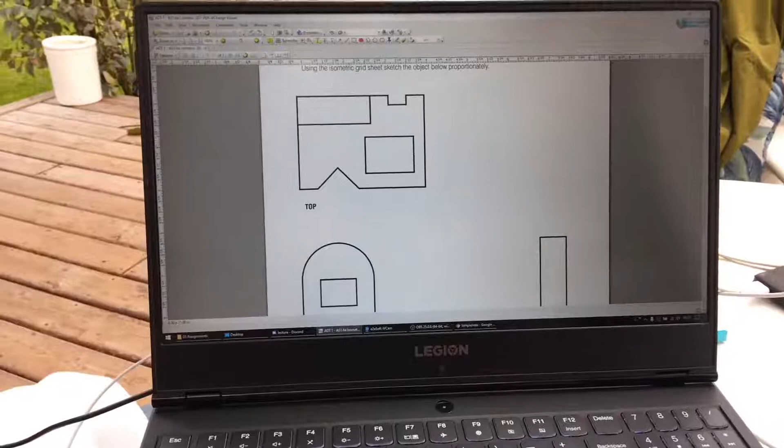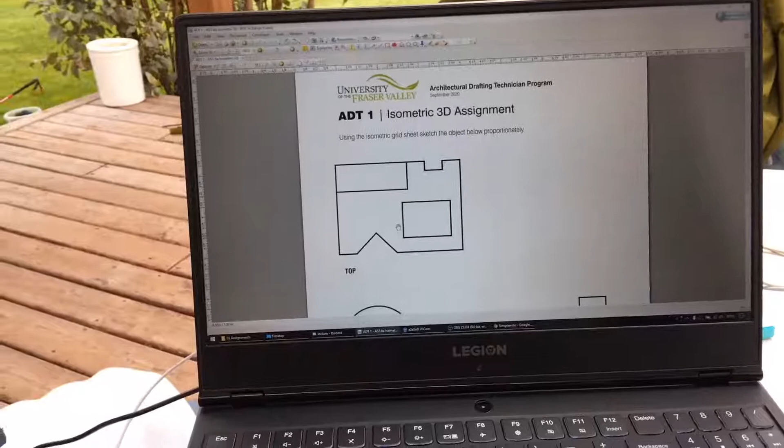So this is just to record how you would deal with the situation if you don't have your paper printed, for the isometric 3D assignment we are working on now. What you need to do is set your scale level in your PDF viewer so that you get exactly 8.5 inches measured width on your screen.

Once you've got that, then you can switch over and measure whatever you've got to do in this assignment using your metric scale. Because we'll be doing all this isometric stuff, generally speaking for the parts, in metric. Once we do some architectural stuff, we'll switch over to the imperial scale for that.

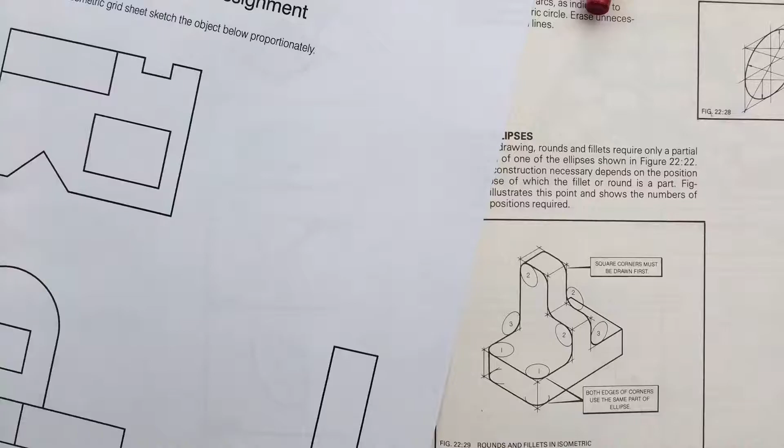So I've got a printout of this thing here, so we can start talking about how we would start drawing this thing in isometric 3D. So I got my paper here ready to go.

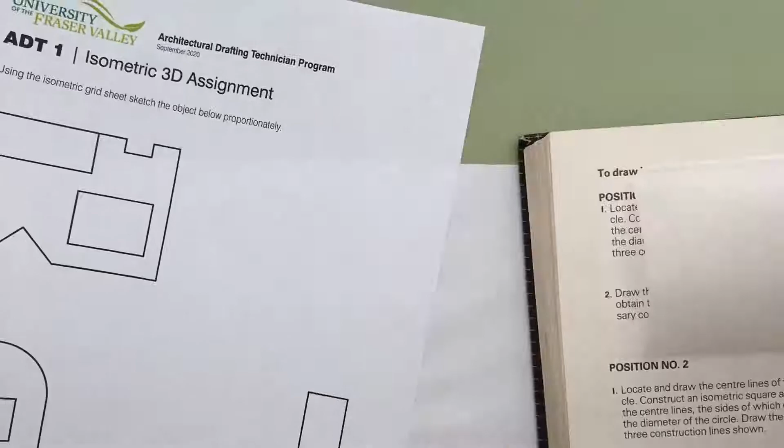Okay, so I'm going to start measuring things, measuring the different bits of this, and just kind of figure out what I've got for dimensions. So I'm going to draw it at 1 to 1.

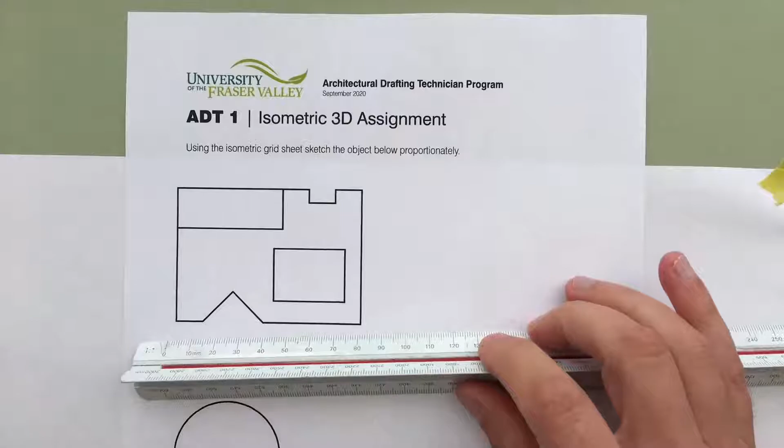So what do I got here? I got 78 at the bottom. And then in the other direction here, I've got, looks like about 56.

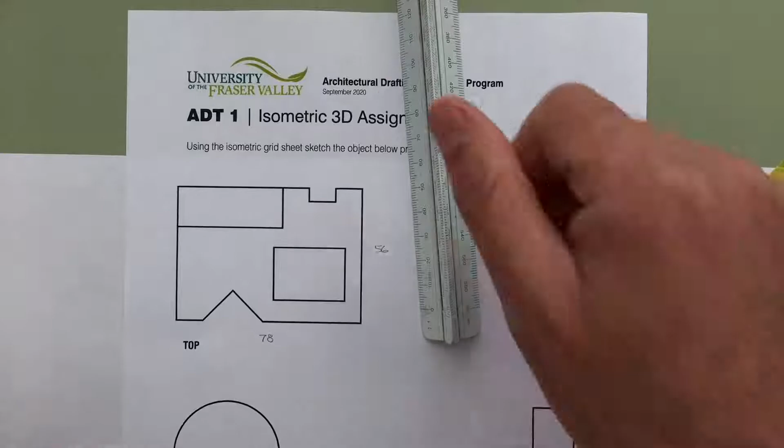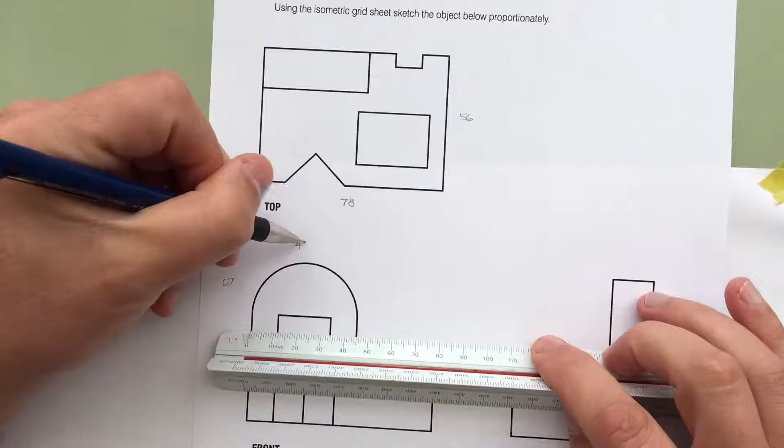And then this thing across, I need to have this so I can start drawing up my isometric. So this thing's 45 in that direction. You can kind of see the layout of this thing. And then depth at the bottom here, 17.

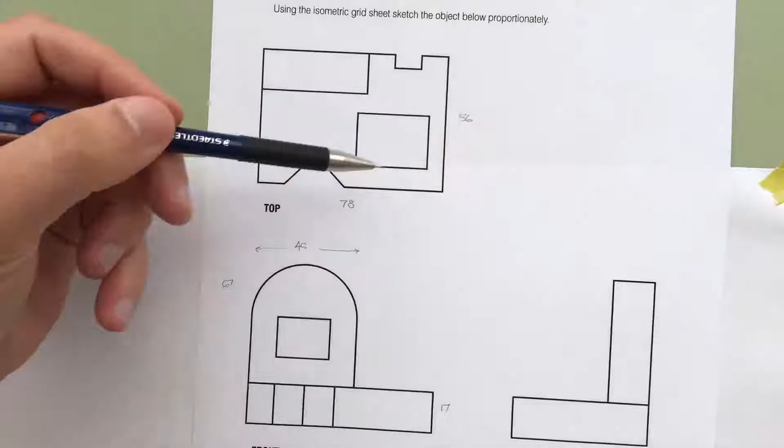All right, so with our overalls in mind here, overall dimensions, 67 here for the total height. I should have put the dimension down here, less confusing. Now let's look at putting this whole thing together.

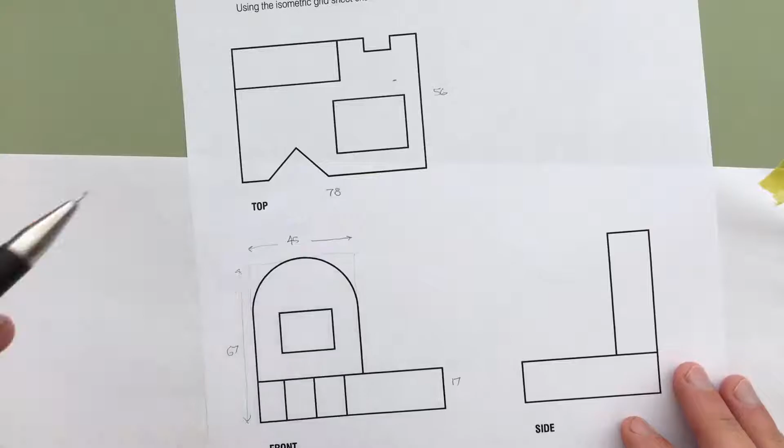So we're going to be doing this isometric circle, but first what we'll do is we'll box out a rectangle for it. Then we'll come back and do the isometric circle for it.

Okay, got to break out the 30-60 square here. So what I'm just going to do is just make sure I've got enough room at the bottom here. Oh no, just realized I didn't put my sheet anywhere in the vicinity where you guys would be able to see it. I got to move it up. Okay, that's better.

Okay, so first things first, I'm going to start throwing down some construction lines here. So these things, in terms of where your position can be on the sheet, like based on how big this thing is, you know, it's pretty small.

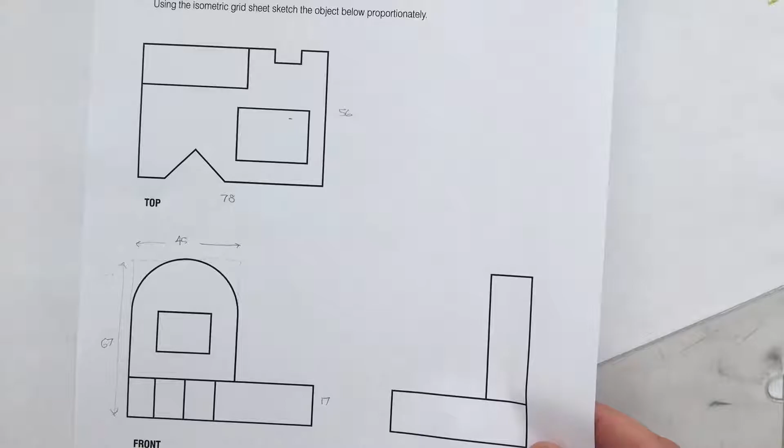So another thing that we could do is we could blow this thing up so that it's easier to draw, because once we start drawing these curves here, things are going to get a little tough. I'm going to stay at this scale just because of the distance between the phone and the screen, and this will lend itself well to its visibility with you guys.

Okay, so I'm going to draw my isometric right and left axes. So I've got a base plane here. So these things need to intersect.

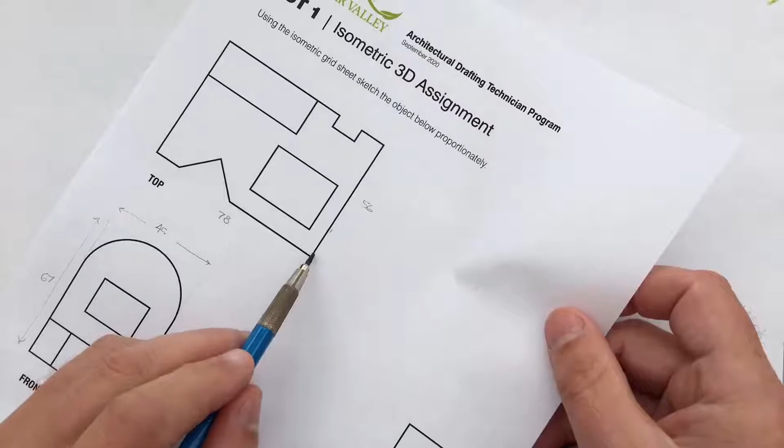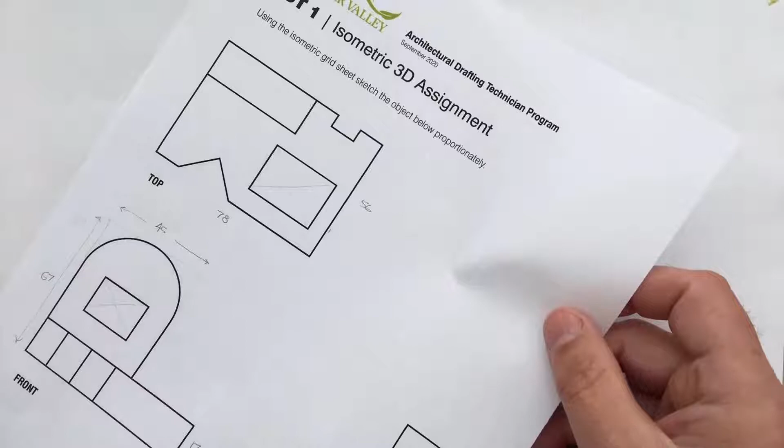So what these two intersections represent, it's going to represent the bottom of this corner. So right there. Now you can see we've got a hole in it here, and we've got a hole here. So we've got to keep track of where those things are as well. And we've got this little V here, and that's going to present some interest as well.

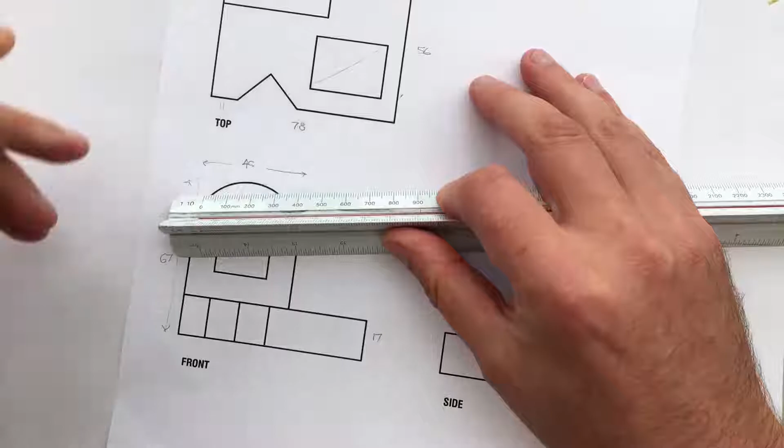And what I need to do here is just make sure I get the dimensions of this. So to there it's 11. And then the depth of this thing, I'm going to say is 13.

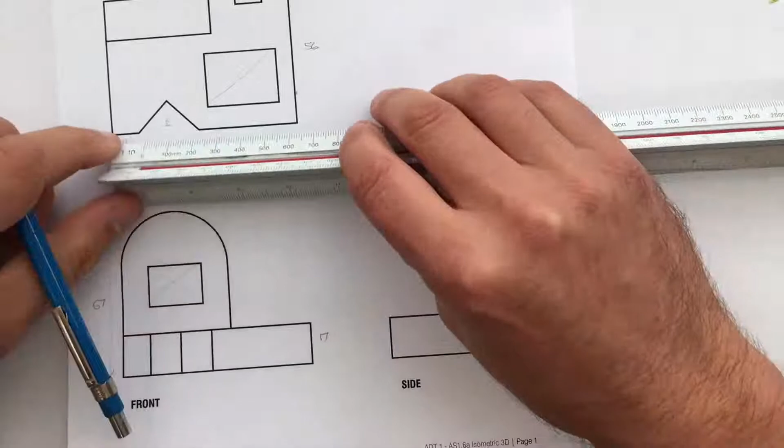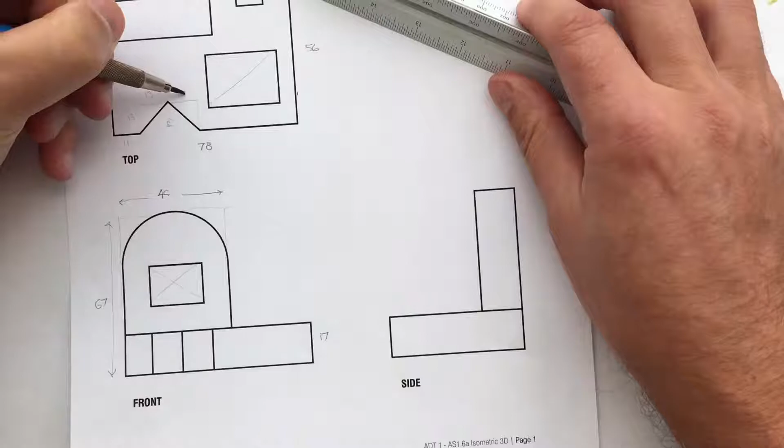Alternatively, what we could do here is measure this dimension as well. But this still ends up being easiest because it's going to be 13 on each side of the 45, so you can kind of see the numbers there and the way that's going to break down.

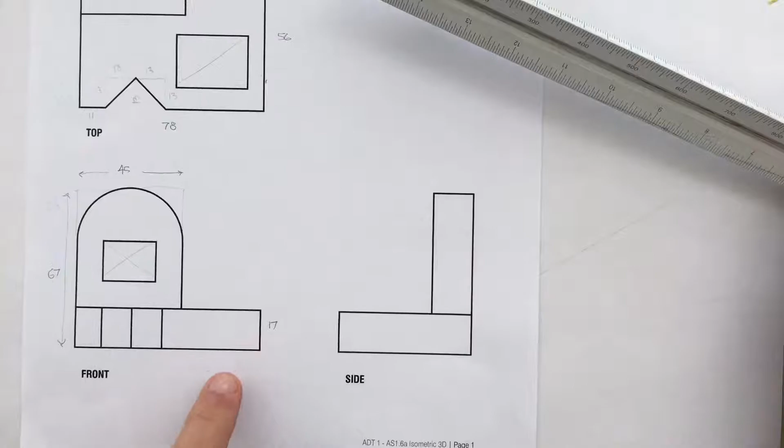Okay, so that's our bottom corner. Now what we're going to do next is draw the bottom plate here, this whole area. So I've got to come up 17, then go over 56 in one direction and 78 in the other. So here we go.

So I'll get my square here, and very precisely from that intersection, up we go. Okay, so there's 15, there's 17 there. That, if you can barely see it.

That's going to be where I start drawing off the two sides of my plate. So again, I'm going to pull up the square here, and one in the other direction. So then measure our 56 and 78 here.

56. Just realized I started to use my 1 to 10, but that's okay, doesn't really matter. Okay, and there's my 78 on the other side. So that means it's going to start finishing off my plate here in each direction.

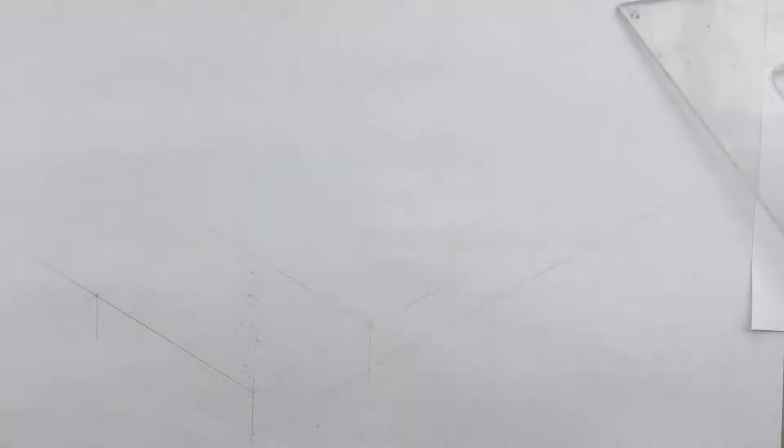So some of these extra construction lines here I'll just erase so I can clean things up a little bit and not get confused. Okay, so there's our base plate.

Now we've got our rectangle at the back and we need to construct it on top of what we've just drawn. So I need to get the dimensions for that.

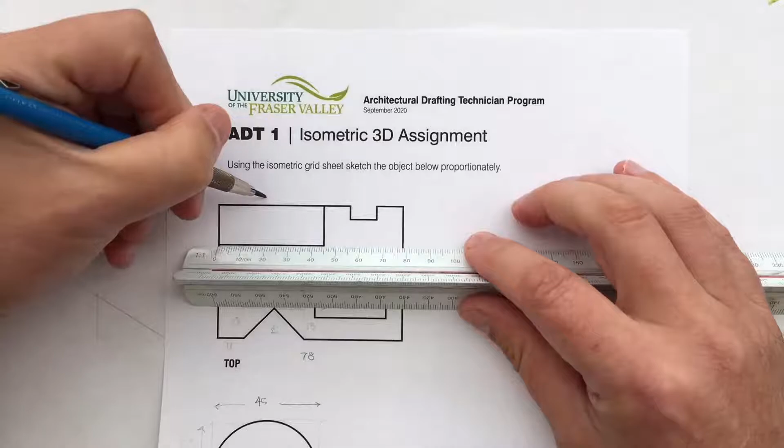Man, it is crazy how damp it is outside. I can feel how the paper is already beginning to absorb moisture as I draw, which kind of sucks because it makes the paper soggy.

This is a tough one. So I'm still going to round it to the nearest millimeter, though, just to keep it simple. So that's 17, so 45 by 17. All right.

So measure from the top corner here. You can find the, yeah, the instructor's trying to draw with the eraser, huh? Good luck with that.

There's 45 there. 17 on the other plane here off to the side. And now we can draw our construction lines for this. This can go pretty quickly because you could just take this square and flip it from side to side to draw the two sides of the rectangle.

So there we go. So now we can project this thing upwards. I'm going to slightly erase some of these construction lines in the background because this bit here is not going to be seen. These two bits of lines here aren't going to be part of this drawing.

Okay, so 67, 17, this should be approximately 50 high. Okay, so that was correct.

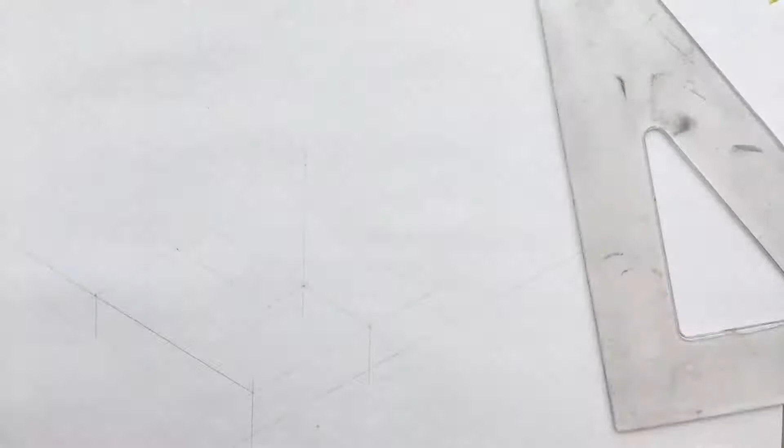So now what I'm going to do is draw, here I'll put a construction line on so I don't screw this up, and then measure 50 upwards. There we go. So from there, we're going to get two lines to draw.

And you can kind of see what's going to happen here. Having drawn this one little mark up here at 50, the rest of the thing I can just construct with projected lines. So it's actually pretty straightforward stuff. So here, where these two lines intersect, project the line upwards. From here, we just go back.

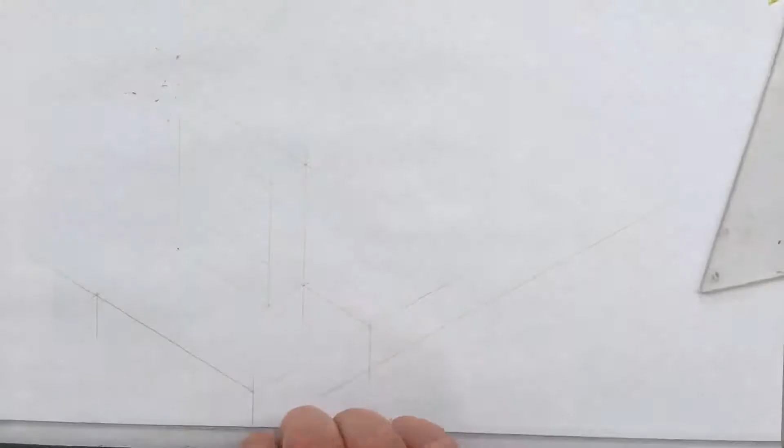Like so. And then I'll erase a few of the projection lines. You guys can see how that is coming together.

Hopefully you're all able to see what's going on. I can hear a few of you already drafting in the background, drafting equipment noises, which is great. That lets me know you're all actually alive, since you haven't had any questions or your normal interjections this morning, which I always appreciate.

Yeah, thanks, Irene. That's much appreciated. Hey, ain't that the truth? Absolutely.

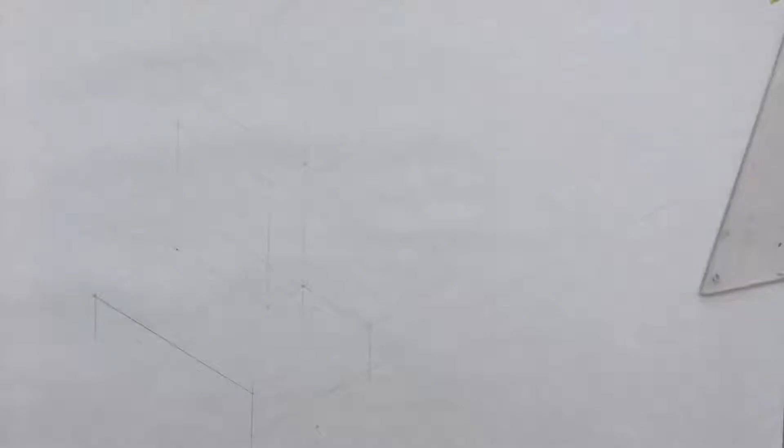Yeah, no, exactly. It's good to see the smoke definitely gone. And yeah, even my chickens, I don't know where they are, at least they're not raising a ruckus on YouTube. My setup has, there's been a lot of amusement in the faculty at the gantry that I built. Some of them were pretty amused too, and they asked where they could get chickens to have in their lectures, and I said, well, get your own damn chickens. Maybe they won't interrupt her.

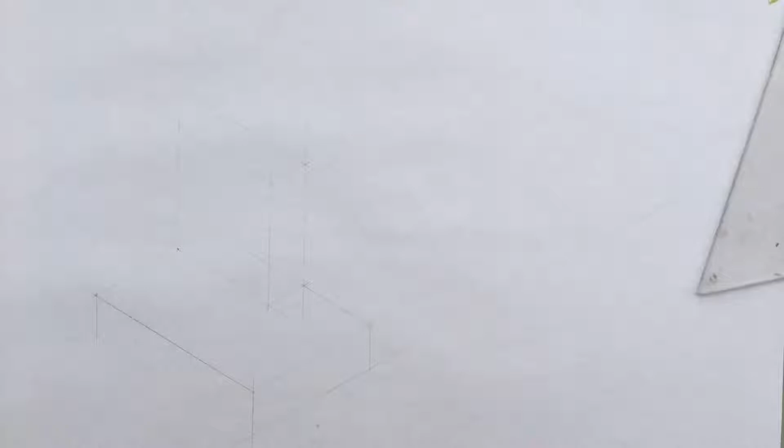My plan, well, I'm undercover, so that's good. The question will be how much background noise. Hopefully the headset will dampen a lot of it. If I have to move inside, I will do so, and I'll boot off all my other kids who are online learning right now, because Daddy needs a ton of space for this stupid thing. Getting this thing to fit on the dining table is a bit of a hassle.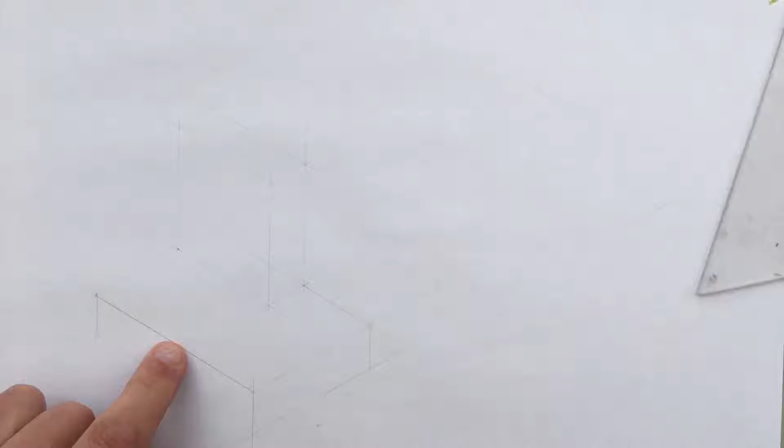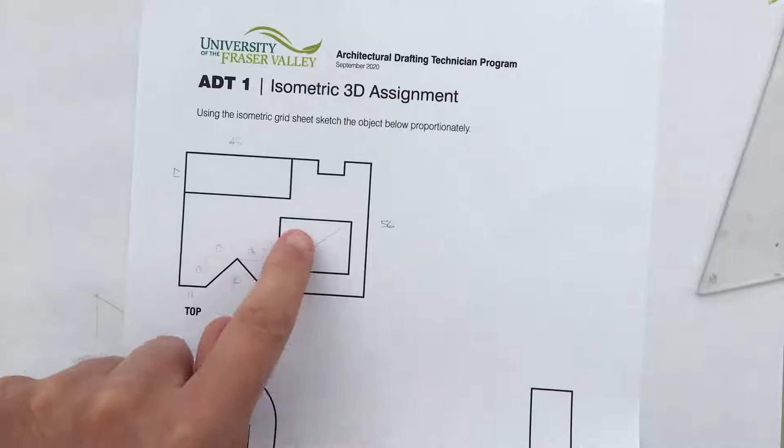So next we're going to look at the notch. What we have to do is measure. If you remember our measurements from here, we're going in 13, over 13, over 13, and then back down again. That's how we're going to construct this 45. So we've got a rectangle of 13 by 26 basically that will help us sort out where this notch digs in. You guys can figure out how to do the opening there, so I'll leave that one with you.

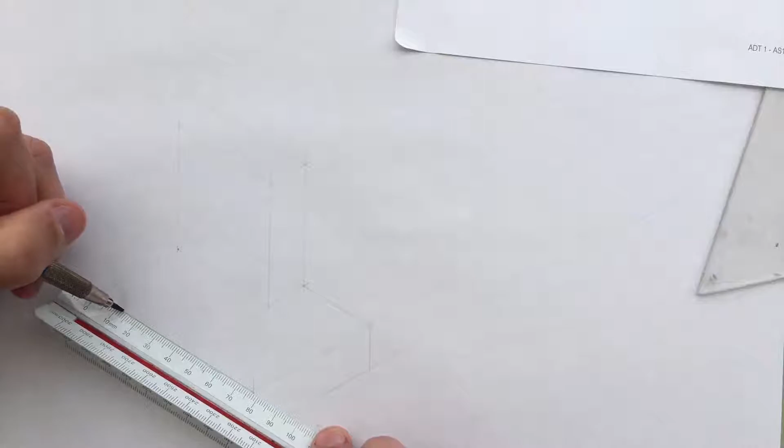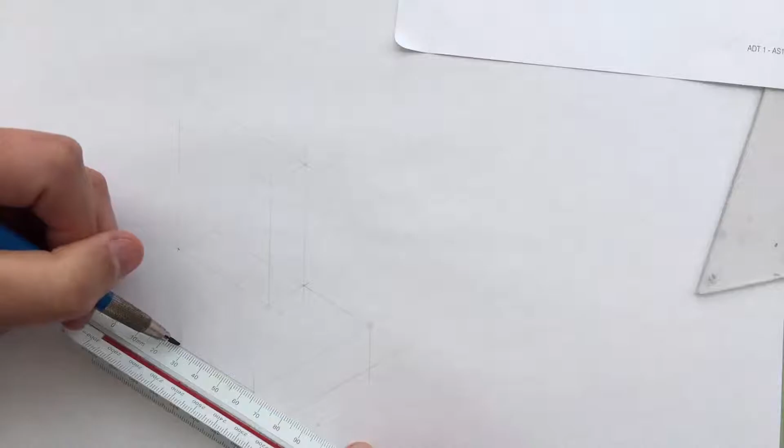But we're going to look at the notch next. I am going to come down 13 from the corner here, and then I'll measure 13 and 26 for the cutout for the rectangle. So there's 13 there, and 26. Now I've got to measure, and I'll start here from the corner because it doesn't really matter where I do it.

Okay, so now I can construct the box, the rectangle rather, that will help me do this cutout. Okay, so then I got the halfway point here, and this will allow me to construct the notch.

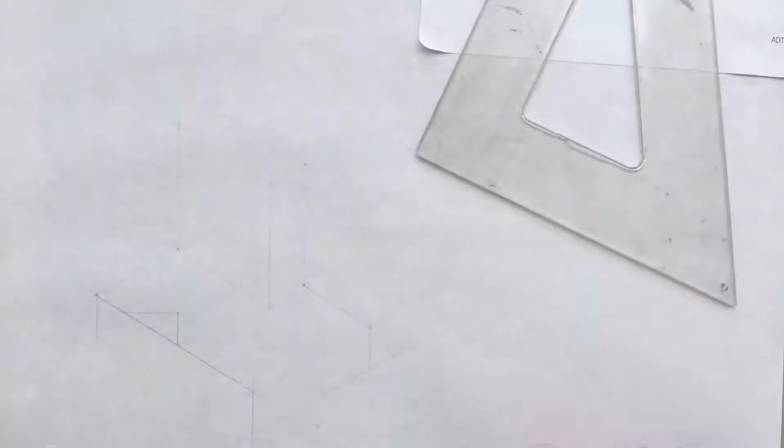Okay, so now to draw this, I got to connect these two together, which, hey, look at that, it is a vertical line. Now if it wasn't a 45, of course, it wouldn't be, but this means we can actually use our set squares for this. So there's the vertical part of the notch, and there's the horizontal.

And then I can draw where the cutout begins. So this is the base of the thing, so that's going to project inwards. But I'll finish this one off to draw the notch and project it down to the bottom of the base of this thing. There we go. And then this piece comes across.

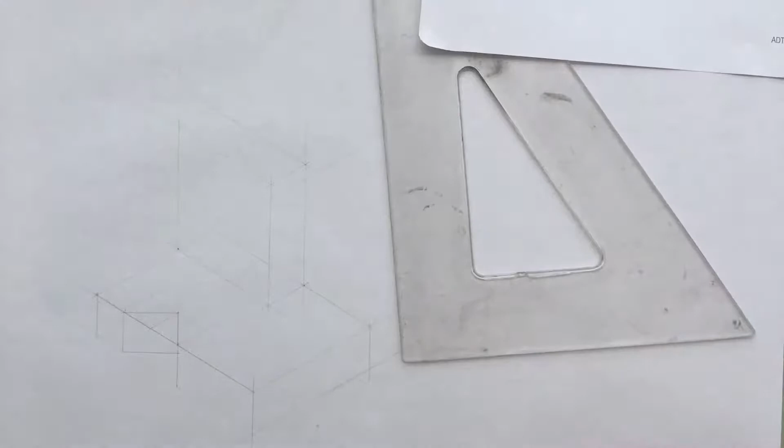And that's it. So now, break out the eraser shield here, and we can erase some of these lines that no longer need to be here. Now these, of course, are still construction lines, but for me it's nice to get anything that doesn't need to be there out of the way.

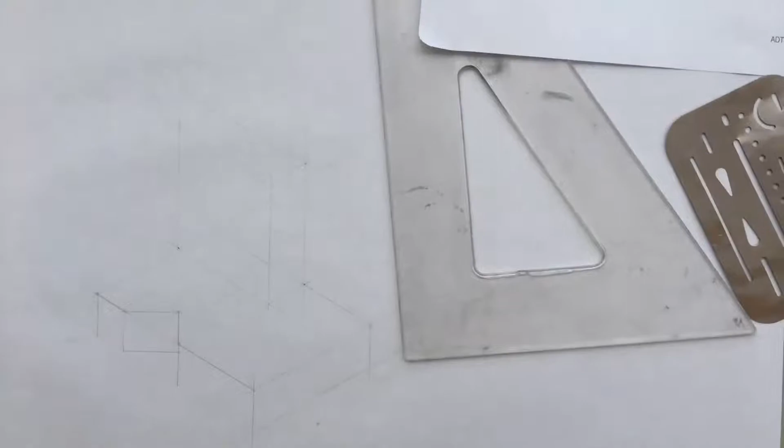So you can see how that got constructed. So I will, just with my construction lines here, add a little bit more weight so that it'll be easier for you guys to see online here how that's coming together. So that's the notch.